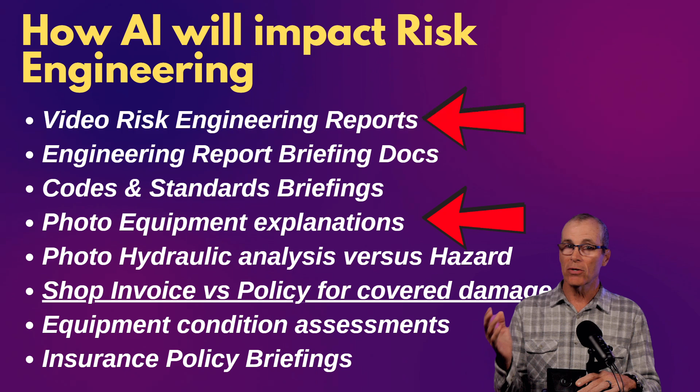Photo equipment explanations. I'll show you some examples where we actually take pictures of equipment out in the field and ask it to explain what we're looking at. And then we'll look at photo hydraulic analysis. We'll be able to take pictures of the hydraulic placards on fire sprinkler systems, compare that to pictures of the warehouse storage, and ask, will this equipment be protected by that hydraulic system, by that fire protection system?

Shop invoice versus the policy. I took a repair invoice from a gas turbine wreck and an insurance policy, put them both into AI, and said, find the covered damage. It not only found the covered damage, it pointed to me in the policy where the coverage was. It found the non-covered damage, pointed out the exclusion. So as a licensed insurance agent, I was able to make sure it wasn't garbage in, garbage out, but it sped up my work tremendously.

Let's look at a video engineering report right now, just to give you an idea of what they're like.

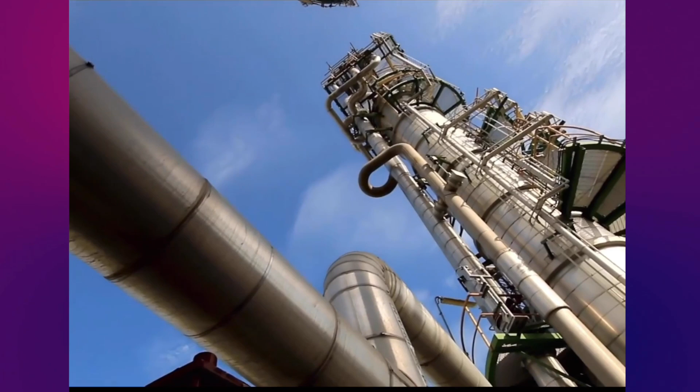The Specialty Partners Refinery in Shreveport, Louisiana was the subject of a property insurance loss control survey conducted by Star Technical Services on October 18th and 19th, 2022. The survey included discussions with plant maintenance and operations managers, as well as the inspection supervisor, safety specialist, and VP of tax. During the visit, various aspects of the refinery's operations, maintenance, and facility layout were reviewed, including process control, building construction, maintenance practices, and mechanical integrity. As a result of the survey, 4 new recommendations were made for loss control and risk improvement. One of the previous recommendations remains open. 5 recommendations have been completed, including the extension of the sprinkler system, inspection of the deep well pumps, plugging of inspection ports, securing the old control room, and development of an emergency isolation valve placement document. The new recommendations include the inspection of vibrating piping, installation of fixed LEL detection, correct low positive purges on junction boxes, and training for operators in the use of fire monitors. The facility personnel were well prepared for the visit, and management demonstrated its genuine commitment to the property loss control process.

Partners is a leading producer of specialty hydrocarbon products with facilities in Indiana, Louisiana, Missouri, Montana, Texas, and Pennsylvania. The company is divided into two segments: specialty products and fuel products. Shreveport Refinery is part of both segments, producing both fuels and various oils. The refinery has a capacity of approximately 57,000 barrels per day and typically processes between 42,000 and 55,000 barrels per day. It is a moderately complex facility with hydrotreating, catalytic reforming, deasphalting, and lubricant base oil processing units. At the time of the survey, the facility was operating at 49,230 barrels a day.

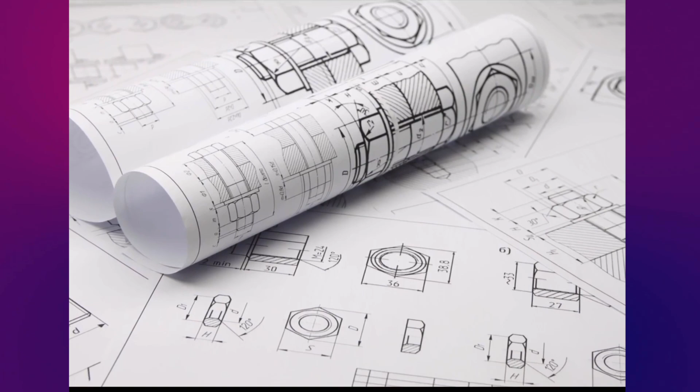Okay, so that's what one of them looks like.

It told me that it depicted an outdoor setup likely related to a solar energy installation. That's true. It told me that the cabinets were probably full of inverters, and that's how we convert the DC power from the panels to the AC power for the grid. It might also contain switchgear, transformers, and monitoring systems. I kind of knew that stuff, but it went deeper.

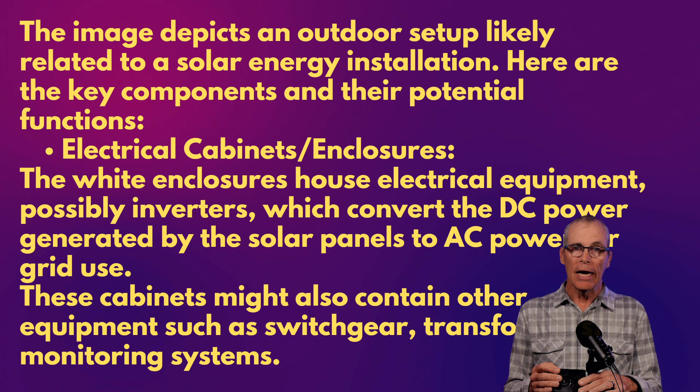I didn't ask it anymore, but it kept explaining the security and monitoring. It saw a pole there with cameras on it, and I didn't really pay attention to that. I wasn't looking at the security, but it pointed it out. And it pointed out that there was a person there on the side of the photo taking pictures, probably for documentation and maintenance.

But we had stacked IBCs that were full of oil, and they were 3 high. And this StarTech engineer wanted to send that photo and the hydraulic nameplate photo back to his home office so their corporate engineer could look at it. Well, that evening, I just asked AI to look at it. And what did we get?

Well, I asked this question: would IBC containers full of oil stacked 3 high be protected by these systems? AI said pretty much no, it's going to be a very severe fire. It might be able to contain a small fire, but not one with the storage arrangement that it's looking at.

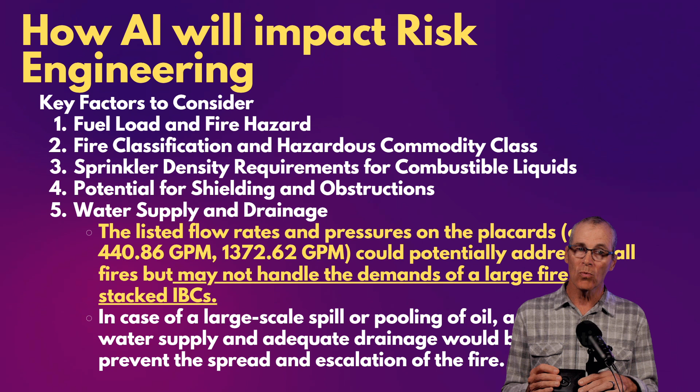And it gave me the reasons why. It told us that the listed flow rates weren't adequate. So it gave recommendations, I just asked it, will it work? And it said no, but then it went through and gave us recommendations: increase the density. Of course, that needs to be done, we thought about that.

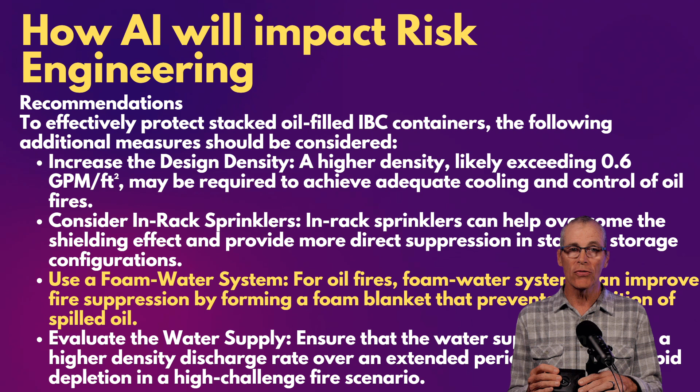Consider in-rack sprinklers, use a foam water system. Now, this is one we didn't immediately think of, but it made a lot of sense when we started thinking about all the extra water we were going to be pouring into this warehouse. Evaluate the water supply. So it gave us very thorough recommendations to make sure that this system could handle that hazard.

More use cases, let's keep going.

AI-generated risk engineering reports. Now, this isn't just a video report, this is taking all of the raw documentation that, as risk engineers, we ask for before we go to a facility, such as maintenance records, outage reports, the last time the fire pumps were tested, their annual reports, battery testing. All of the information that we request, you can put it into AI and ask AI to write a risk engineering report. It's pretty phenomenal.

AI-generated standard operating procedures. This is a great way to get a quick procedure written that covers what you're looking for. I had a facility out in California that was a small hydro facility, very small, and they needed a hot work procedure.

It was something the insurance company recommended. They asked us, where do we get started? There's many of them out there that you could cut and paste from, but I just asked AI to write a new one for a small hydro facility in California, so it was tailored for the project I had. I wouldn't have had the resources or time to start one from scratch, but the head start that this gave me made it very worth doing for a small client.

Risk recommendation themes across fleets. Now imagine you've got 20 locations around the country, landfill to methane capture facilities, and you have over 100 recommendations, and you need to go through them every month with the insured. Well, let's ask AI to take all 100 of those and give us a common theme across any of the facilities if it could find them. Well, lo and behold, we did that, and it found 10 common themes across 20 locations that if you go out and approach those, you talk to risk management and to corporate vice presidents of engineering, hey, guess what? If you do these 10 recommendations, it's going to apply across your whole fleet. So it's something that helps you target the low-hanging fruit.

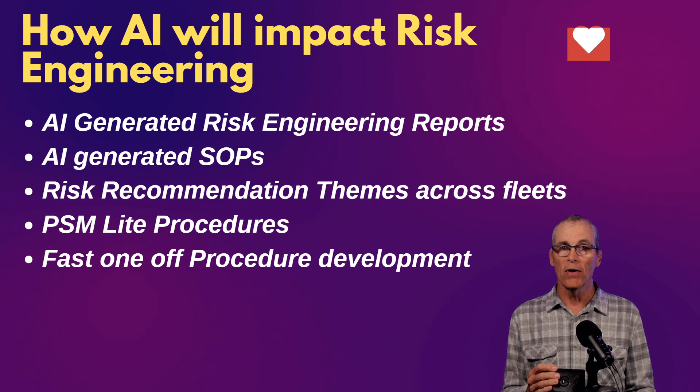Fast one-off procedure development. Again, if you have to develop something for a small facility, it's easy to do it quickly. Special hazard protection guidelines.

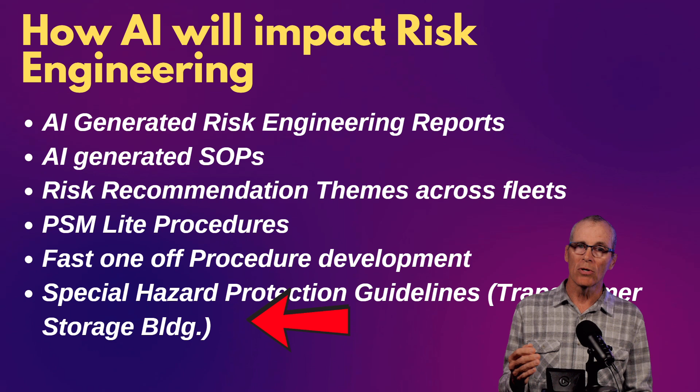We'll get to more about this, but say that someone's going to do something at their plant and they want to know what they need to do to protect it. Here's what we had happen. We had a storage situation for a spare generator step-up transformer. They were going to buy the spare and they were going to store it in a building. They wanted to know how to build the building.

They asked us to find out what the insurance company was going to require. We sent that request off and then asked AI at the same time. We got the AI response much quicker than the insurance company response. Basically, the first thing they started with was temperature control and environmental, because that's what's going to destroy your spare parts and equipment - humidity and temperature. They even wanted redundant equipment in there too.

Humidity management. Humidity is going to cause your biggest problems. Physical protection. It asks for fire protection, all kinds of fire protection - early warning, firewalls, spacing, FM200 system. So when the insurance company replied back, they said to at least put sprinklers in there, some sort of fire protection system. So at least the insurance company wasn't completely off of what AI was asking for.

Now let's get into more use cases. Training programs based on standards and videos. We can take a standard PDF document, we can take a video from YouTube or a training video, and we can freshen it with AI.

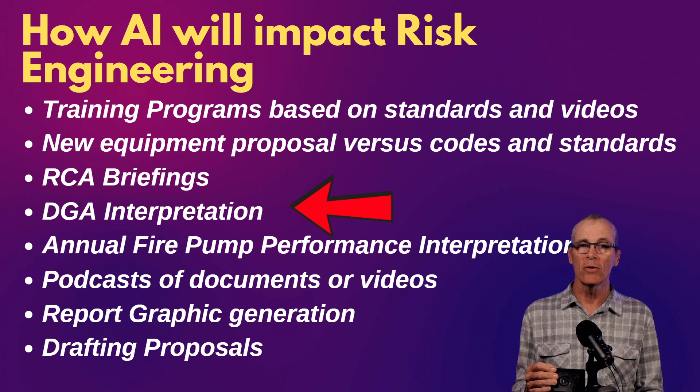Report graphic generation: if you've got a report that's full of text and you need to spice it up, Napkin AI is great for converting your text into graphics. Drafting proposals: if you're ready to do some work and need to propose it, write statements of work, AI is great for drafting those.

On this dissolved gas analysis report, I asked AI to interpret it for risk engineering and insurance purposes. It gave us a great asset overview: what the transformer was, what kind of oil was in it, where it was, how many gallons, its operational status. Then it looked into the markers, the actual gases, and found that a couple were exceeding normal limits. It told us what might be causing that, thermal and elevated temperature, electrical fault.

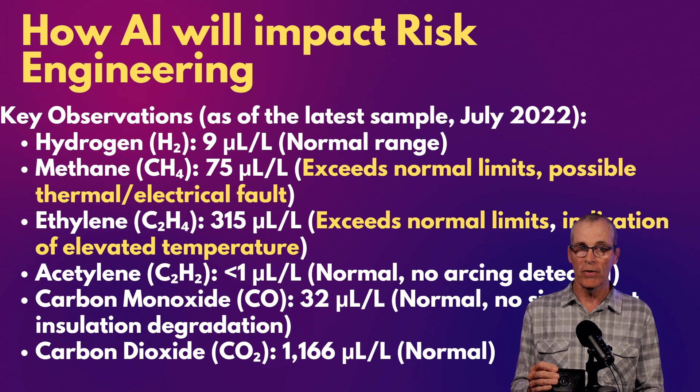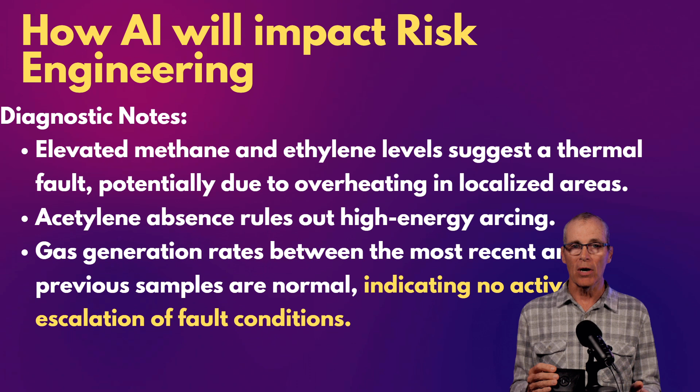But even beyond that, it told us there's no active escalation of fault conditions. So it looked at the history, which is really good, because a lot of people just jump to the latest reading, see the gas, and say we've got a problem. You may not have a problem. You need to look at the history, and that's what AI did just from that simple prompt.

More use cases, let's keep going. So I strategized a round at a new golf course. Yeah, just mixing a little bit of work and pleasure.

Writing articles: I write a lot of articles for LinkedIn, and AI gets me started. It's really helpful for thinking through articles.

Philosophical discussions: what is worthless and priceless at the same time? AI came up with a lot of answers. My particular reason for asking was I thought about Bryson DeChambeau's clubs. They're all one length, so nobody else can really use them, and yet they were used to win the U.S. Open, so they belong in a museum. So priceless and worthless at the same time.

Process flow diagram explanations and process improvements, we'll get into that. Production data interpretation.

I was sitting in a presentation, a bunch of engineers around the room, some financial slides came up. I wanted to understand the finances better of this facility, so I took a picture of it and asked AI for an interpretation. Quickly, I knew what the most important product line was, so we'd know what equipment was the bottleneck regardless of how it was configured. Now we knew the reason for the facility and what the online or market price was at the current time.

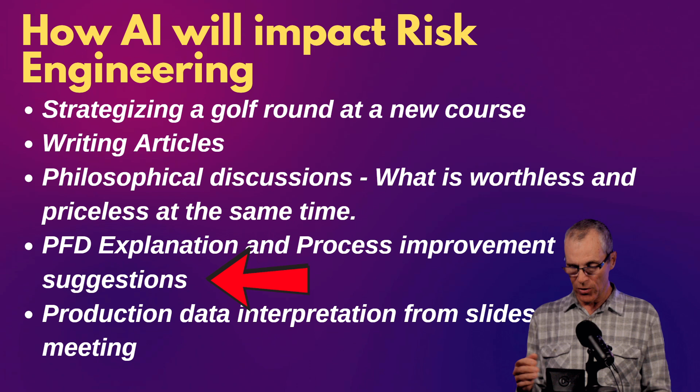So I actually knew more than the vice president of finance sitting next to me, and I definitely knew more than the rest of the engineers in the room.

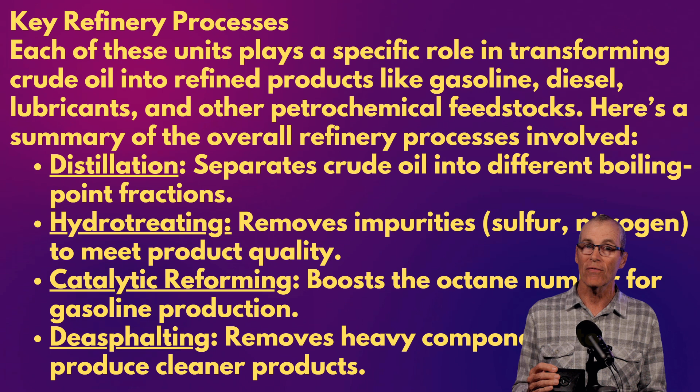I told the manager of engineering from corporate to take a look at this, look at what it got from just looking at that picture of the process flow diagram. He said, can it improve the process off the cuff? So I said, let me ask it. It did, and it actually came up with many ways, about a dozen, to improve the process. One was just to upgrade the heaters to have more efficient heaters.

Let's get into even more use cases: developing maximum foreseeable loss and probable maximum loss in facilities. If you give enough information, AI will tell you what's the worst that can happen and how much it'll cost.

It's really amazing, you can learn anything, and there's different ways to do it. You can just ask AI to explain it, or with Notebook LM you can go into a particular document and start interacting specifically with that document to learn from it, and understand the reasoning behind it.

A question came up as I was preparing for this presentation about how do we guarantee no garbage in, no garbage out? Well, you have to understand the reasoning. If you see how the AI reasons, you'll have a better sense that it came up with the right answers.

Stock suggestions: AI data center cooling companies. If you've ever thought about the picks and shovels of the gold industry, what is it for data centers? It's the cooling companies.

Interpreting health test results. At my last physical, the doctor said, 'Hey John, do you mind if we record this with AI? At the end it'll have all the notes, I won't have to spend time taking them, I'll be able to just interact with you better.' I said that's perfect, I understand AI, go ahead and use it. But I wanted to interpret the results of my tests with AI. AI is great for helping you understand supplements and nutrition, which doctors don't understand - they don't get trained in it. So you can use AI to interpret your health and get better suggestions.

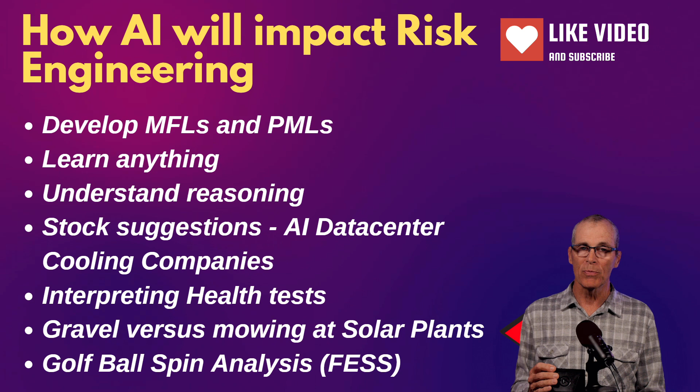And then the golf ball spin analysis. This really applies to flywheel energy storage systems. My example will be about a golf ball spinning, but it's the eccentricities that are interesting to flywheel energy storage systems. So with a solar plant, what do we have?

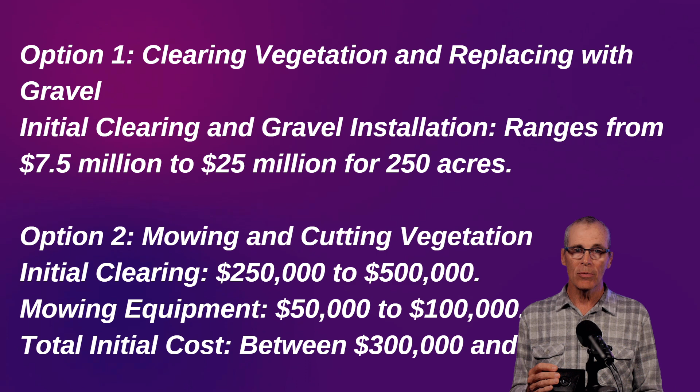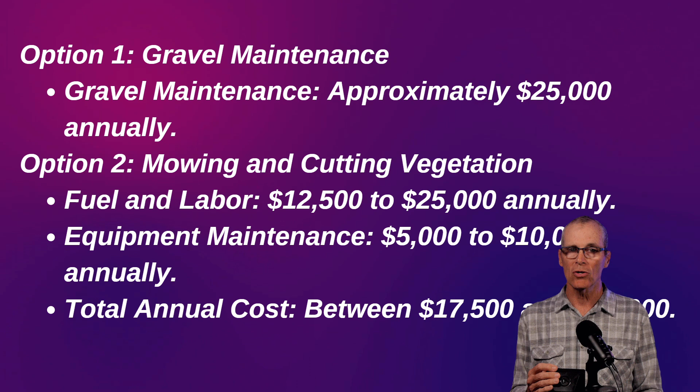One option is to clear the vegetation and replace it with gravel. The second option is to mow it, cut the vegetation, and keep paying that annual cost. Option one has a gravel maintenance cost of $25,000 annually, and the mowing has its own maintenance costs. So what are we going to do?

Well, if we add the fire frequency - this came about because I realized the facilities out in California have way more fires than the facilities in the Northeast. So we had to distinguish what it would take to prevent a fire, and the gravel is going to be very good at that versus mowing, because a lot of times mowing gets skipped or neglected and you could have more fire. It turns out that in this example, a fire frequency of basically 1 in 3 years was going to be enough to...

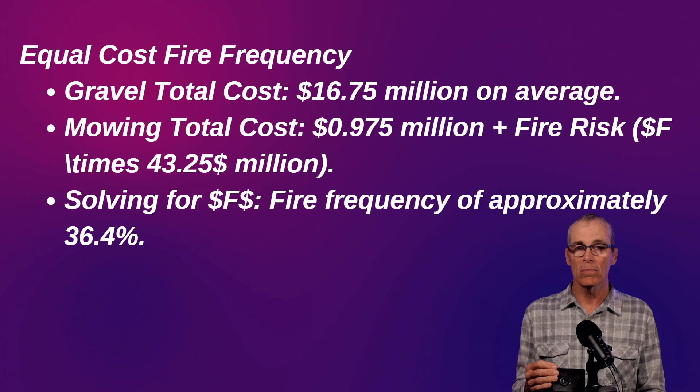...justify installing gravel, but it wouldn't quite do it just yet. I went out to the facilities and talked to the operators, and their concern was that if we install the gravel and later they can't spray the weeds, they're going to have to still weed whack. If they have to do that around gravel, they have to worry about shooting the rocks up into the modules, so they're very nervous about gravel getting too close to the modules.

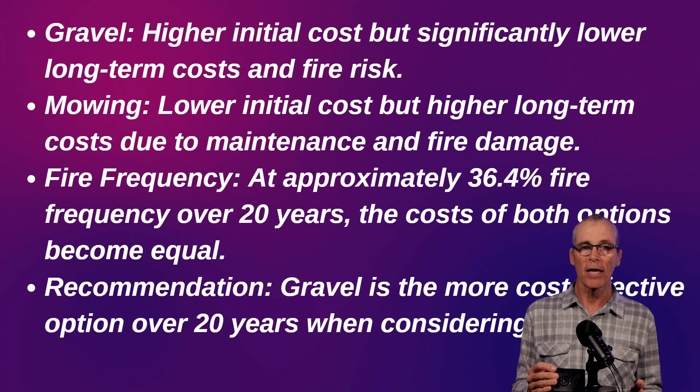Gravel's great for the roads in between - it does act as a fire break. I've seen it firsthand. So it's got its places, but be careful about just wholesale graveling an entire solar site.

Let's get into more use cases - that's what everybody loves. All right, golf ball spin analysis, let's do it. So this is how we make sure we don't have garbage in, garbage out.

We have to understand the reasoning - that's how we make sure we don't have garbage in, garbage out. And research is part of that too. With research, it goes out onto the web and gets information. You remember the early days of ChatGPT, where it would warn you that its training is only good up to a few years ago, so anything that's happened since then it doesn't know about. That turned a lot of people off of using AI, not to mention the hallucination part, where it would just make up answers. With research, you get the latest information, and with reasoning, you get to see how it comes up with its answers so you know it's not just hallucinating.

So I gave it a very long prompt. I said, I play golf, I like to strike my balls with a check-go spinner that spins the balls at 10,000 RPM. That speed causes the balls to shift to a repeatable position based on the internal weight distribution. This is where the flywheel energy storage system comes in - if you have eccentricity in an object that's spinning, you're going to find that it tries to change its location. So I was concerned that as the ball flew through the air, the conservation of angular momentum would cause the ball to curve.

So I asked AI to help me with this problem. Take a look at what it looks like - right, it comes back every time.

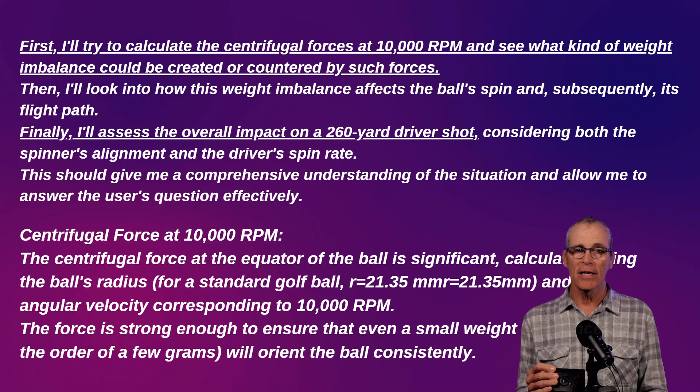And in the end, it finally came down and said that the alignment process can be useful for consistency and setup, but its impact on the ball flight during play is negligible due to the stabilizing effects of the ball spin. So, okay, it says that, and I stopped striping my balls for a while.

But then I noticed that if I hit a ball in the woods and somebody else went over there from another fairway and they saw it, we had an argument over whose ball it was. I didn't have my stripe on it to conclusively prove, hey, that's my ball. So I'm striping my balls again just to make sure I identify them. And I play tournament golf, I have to have my own markings on them, so I'm striping them again.

So this is now where we get into the power requirements. How, as energy risk engineers, all of those applications of AI get fed, and why it needs so much power.

All right, one graphical processing unit uses about 1,400 watts of power. Data centers are now using 100,000 to 200,000 of these GPUs. So think in terms of hundreds of megawatts of power just to run the computers. And then think, if you're making all that heat from the computers, you have to get rid of it. So the cooling systems are another couple hundred megawatts of cooling capacity that need to be removed. That's more power to run the cooling capacity.

All right, so what are the steps to train AI? Think of it this way. If you take a dictionary, an entire encyclopedia, and let's take it way out there, all of the encyclopedias in the world, and you scan them all into a computer. And then you say, based on everything that you see, what's the likelihood that the word pie follows apple? If I say the word apple, does it come up apple pie, apple crisp, apple computer? What's the most likely next word? So that's how AI sort of works. It's a simplified version of it.

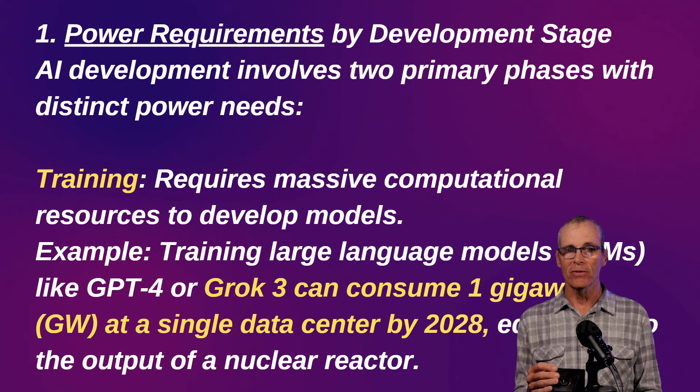And where are we going to see it used? I'll show you some facilities, but Grok can consume a gigawatt is what they're looking at. That's the output of an entire nuclear reactor. And that's just in the development stage.

Now, the inference stage - if you think about a single ChatGPT query, it uses 10 times the power of a Google search. Now think about that. A ChatGPT query is nothing compared to those deep research things that I just used for the golf ball. So the power requirements are going up exponentially. Now, we'll look at Deepseek specifically and how that's going to impact power requirements here in a minute.

But where are we using the power? Well, looking at Louisiana, 1,500 megawatts. Austin, 84 megawatts. Plano, Texas, 40 megawatts. Arizona, 1.8 gigawatts. Ohio, 400 megawatts. Silicon Valley, 700 megawatts. This is all over the country, and folks, it's happening all over the world. Tennessee, 100 megawatts, almost a gigawatt in Georgia.

All right, so what are the operating challenges of building all of these data centers, adding all this power supply? Well, you have the distribution system, and the infrastructure of the distribution system is impacted. As energy risk engineers, we need to be aware of this. So what's happening? Well, all of that load being turned on and off, and then don't forget they're trying to feed that load with renewable energy device sources such as solar and wind.

If you have a partly cloudy day, the solar's going up and down. You've got the load going up and down. The transformer in between is getting whipsawed, right? So the breakers and the reactors and everything that's in between your load and your power supply can be impacted.

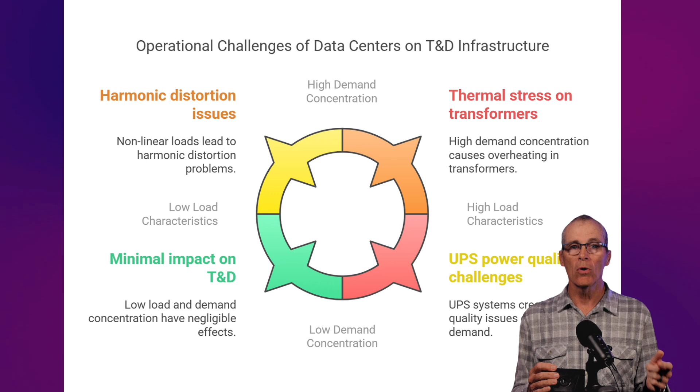All right, AI data centers and Deepseek. This caused a ruckus a little while ago because it's lowered the training costs from 100 million to 5 million, and it's lowered the compute costs to 1/45th of what they used to be.

Now, a lot of people are concerned because Deepseek came from China and they're worried about China stealing all of our data. Deepseek is open source. It can be run on a local computer, not connected to the internet. So that in itself should give you some assurances that you can use Deepseek safely if you use it wisely. If you are using the public servers, just don't put anything in that you wouldn't put on social media. The analysis I did on the golf ball and the eccentricity, that was done with Deepseek.

Now let's get into what makes it so much more efficient. If we're trying to guess the probability of the word 'pie' coming after 'apple' instead of 'Chris' coming after 'apple', we don't need 32 places to calculate our probability to. If we calculate it just to 8 decimal places, we can reduce the calculation power needed. Using all the words at one time rather than apple and then pie, get into an entire sentence, read a whole phrase - that's what Deepseek does.

And you notice that I mentioned that these learn, so it didn't have to be trained on how to analyze a golf ball spinning, but through the process of its own analysis, it taught itself. So it can actually reward itself and revise its thinking mid-process. These are some of the things that are making Deepseek way more efficient.

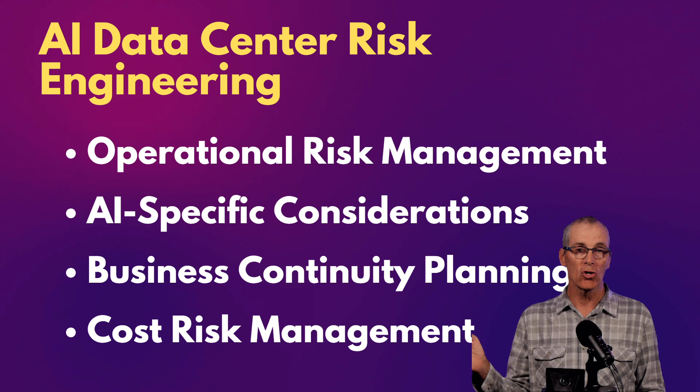And cost risk management - eventually, these things are going to have to pay for themselves. Right now, it's really easy and cheap to get on and use a model. But if you want to embed a model in one of your own programs, that's where you start to pay. So you'll start to see these companies very profitable by renting out or leasing out their APIs for use in software that's distributed, not under the logo of AI.